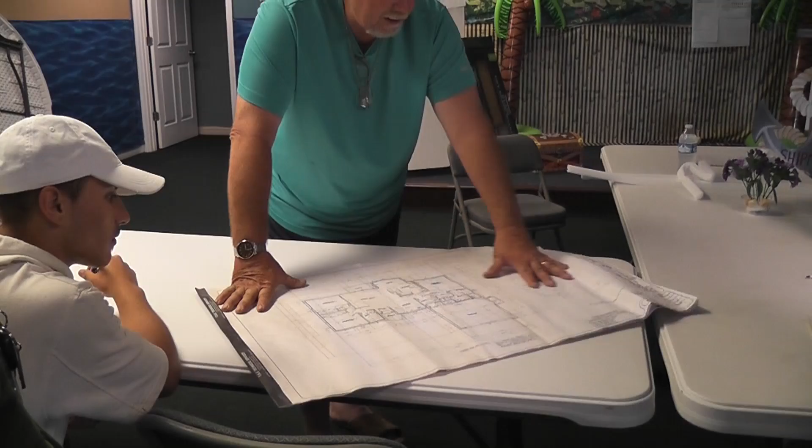Basically what we have here is a house. It's 3 bedroom, 2 bathrooms, kitchen, washer, dryer, laundry tub. If you look over here at the chicken scratching, that's me—this is where I sit down and do a takeoff. I go through and put down different things, like material and what it's going to cost, and round it out.

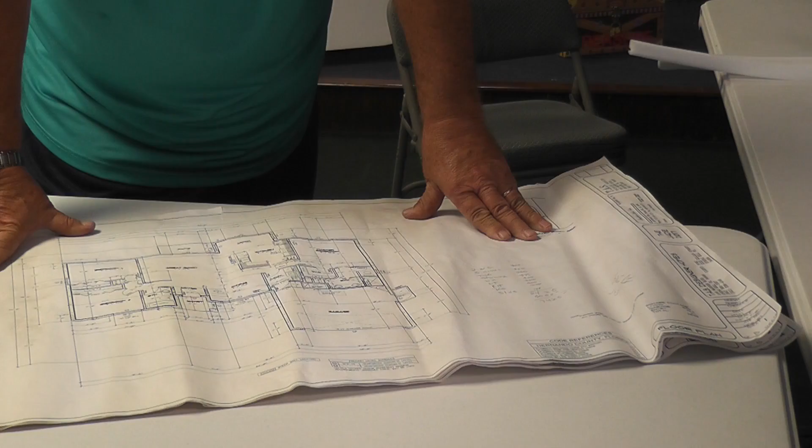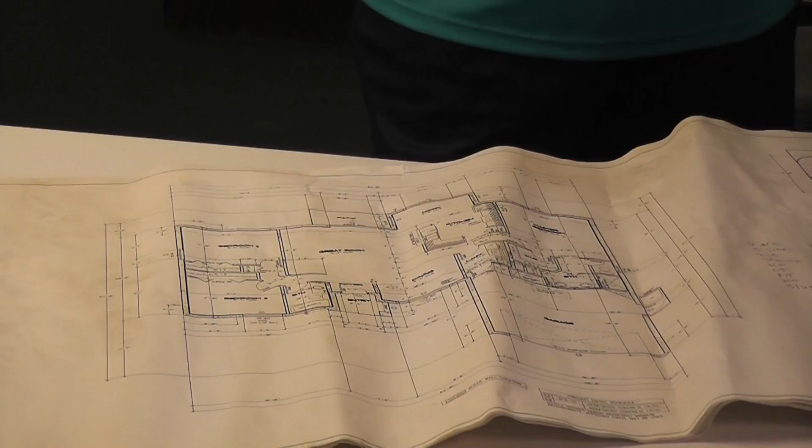So basically I came up with the fixtures for the house at $24.25. Then a toilet, a sink, a lavatory sink—1 fixture each, that's called a fixture. Bathtubs are 2 fixtures, and that's how they count vents too. Don't ask me why, but the state says a bathtub or shower is a double fixture because it uses twice as much water as a sink would, so they call them double fixtures.

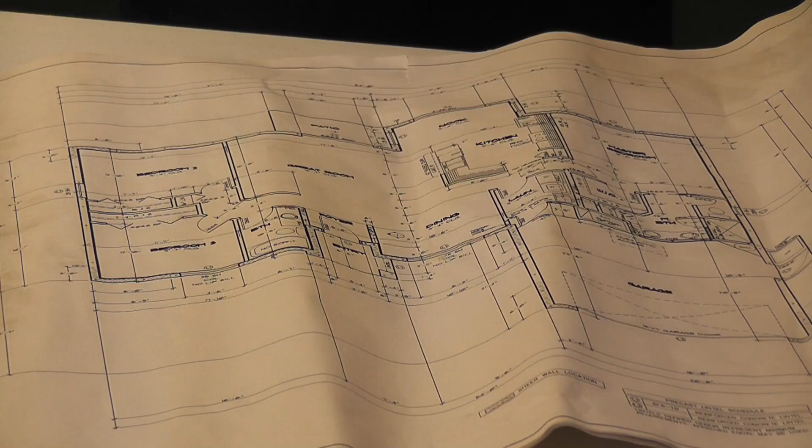A washing machine counts as a 2-fixture unit also. I multiply how many fixture units are in the house with a formula, and that's where I come up with $5,000. So for me to go in and plumb this house underground—remember we talked about the underground, and then the top out and the trim—that house right there is $7,425.

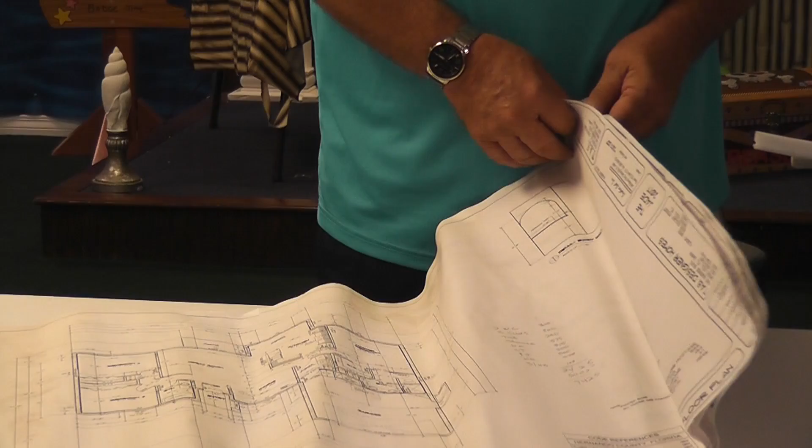When we bid these, we're not thinking we're gonna have to go back and redo all this again. That's the reason you do it right the first time, because every time you go back to move a line or fix something because you didn't do it right the first time, that profit margin goes way down, and your boss ain't gonna like it.

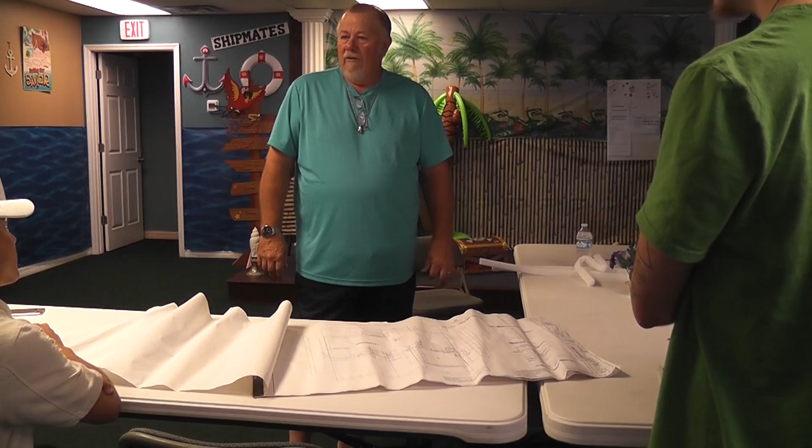So this right here looks like a lot of things. Well, guess what—when we start, we've got this great big pile of dirt, and you've got form boards, wood form boards, all the way around. That's gonna be the perimeter of the slab. So what you have to do is put those pipes in the ground to come up exactly in a wall, in the bathroom, exactly where it needs to go. If you don't do that, then you're in there with a jackhammer busting the floor up, moving it.

This is how you do it right here—these are all your marks. Now if you look, you'll see it goes 4 foot, 2'5", 5'2", 4'7"—there's different marks for different fixtures. So what we do is run stringers, and you start on your form board. For instance, let's say I'm upside down—I can't do this upside down.

So I'm gonna walk over here just to show you. So here we got this great big slab, okay? All your form boards are up, run around, for your garage.

So what you're gonna do is find a wall, an exterior wall. This point, we'll use the left side. Everything we pull from this side of the wall is gonna be from the form board over. So, basically, you're gonna pull to this first bathroom, a stringer, dead center. That's a 6-inch wall, so you're gonna go 17 foot, 4 inches over. Put a stake in the ground. 17, 4 over, you can mark the form board because the board's there. And you're gonna run a stringer. That's the center of our wall.